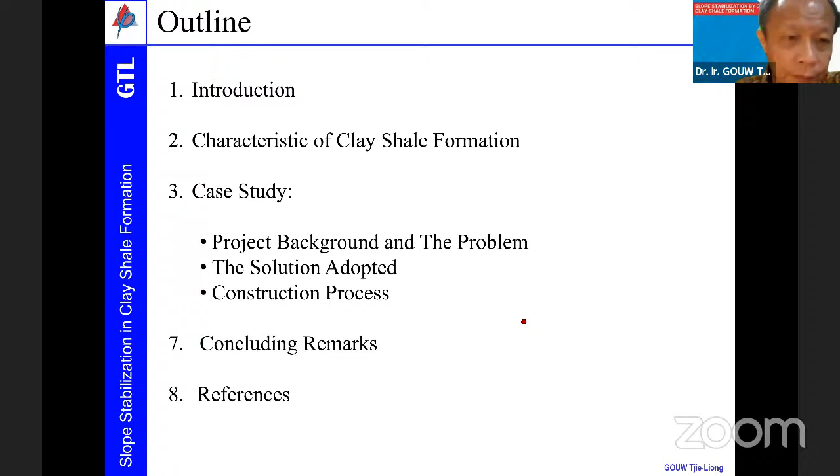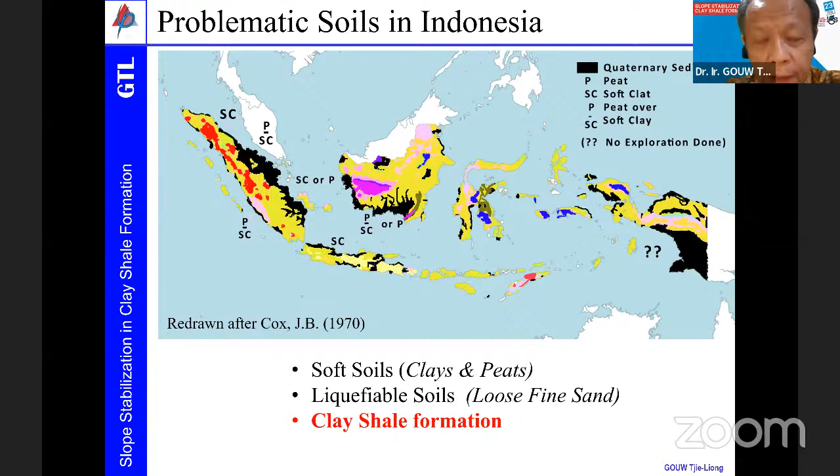This is the map from Cox, if I'm not mistaken, which I modified a little bit by adding some features. There you see the black area is the soft clay area, the peat area, and then you have also the liquefiable soil in the sandy area. We know Indonesia has had earthquakes with a lot of liquefaction occurring, including the flow liquefaction in Palu during 2018. This project is located not very far from that area, as we shall see later.

Now let us see the characteristics of the clay shale formation. Basically it is a fine-grained sedimentary rock formation, geologically formed by layered clay sedimented over thousands of years, then hardened due to long-term pressure, maybe millions of years, deep in the ground. Geological events like earthquakes have brought the clay shale formation to near the surface. In an unweathered condition, it can have an SPT value as high as 60 blows per foot, as we can see here.

Let me bring my pen. Okay, this is an unweathered clay shale formation. It is pretty good, looks quite firm, quite hard. It's a very good appearance.

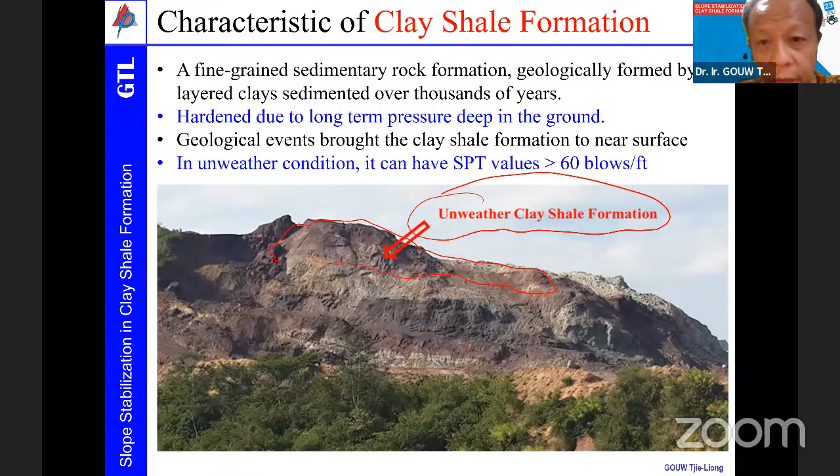Then once exposed to outside weather, this clay shale, if we expose it to the outside weather after we excavate - this is the excavation - we see that not long after, just a few days or few weeks later, it will degrade. It will just degrade and crumble. You see over here, this is from the same area, we took the picture, and it's substantially losing its shear strength. Even if they still look like rock, it easily falls off and disintegrates by just applying a small force onto it. It can be peeled off layer by layer easily.

I have some video to show later how easily we can peel off this material that looks like rock, but is easily peeled off. That's a weathered clay shale formation.

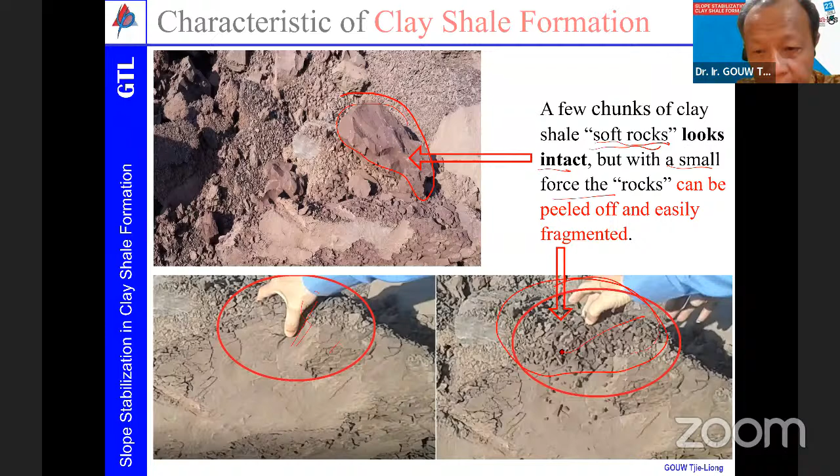This is a few chunks of clay soft rock that appear intact, look intact, but with just a small force the rock can be peeled off. This is my hand, I can peel it off. You can see over here, it's crumbled, crumbled layer by layer. It can be crumbled.

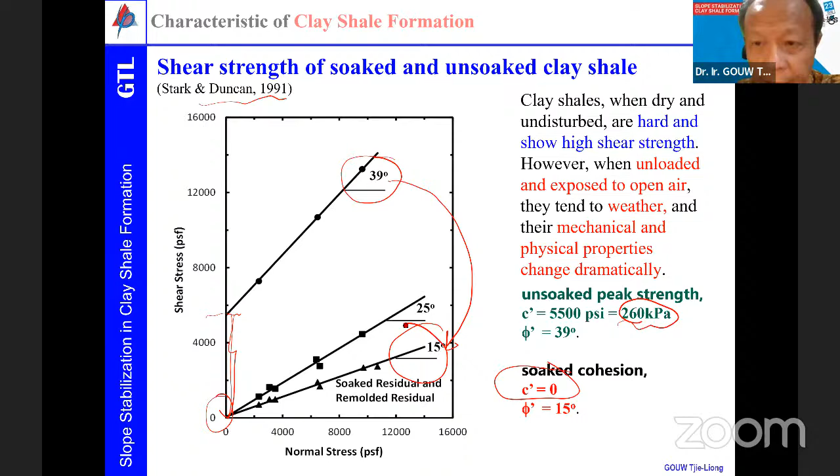Now, if we see some research carried out by Stark and Duncan in 1991 about the soaked and unsoaked shear strength property, we can see that this clay shale formation can have as high as 39 degrees angle of internal friction, and as high as 5,500 psi cohesion value, equivalent to about 260 kPa. But under the soaked condition, after soaking it for a while, the cohesion can practically drop to zero, nothing left, and the phi value can become as low as 15 degrees, from 39 to just 15 degrees. So the physical property changed dramatically - the shear strength changed dramatically upon exposure to outside weather.

This clay shale formation in Indonesia is quite problematic. In some areas, a lot of area actually has this kind of clay shale formation, therefore slope failure takes place quite often, and slope movement also.

So now we go into the project case study. This project, which I choose to present on this occasion, is located in Tana Toraja. Tanah Toraja is located on Sulawesi Island, formerly, or to many overseas people, known as Celebes Island. This Tanah Toraja area is a very special tourist attraction area where you can see dead bodies - they just put them in holes in the cliff area like this.

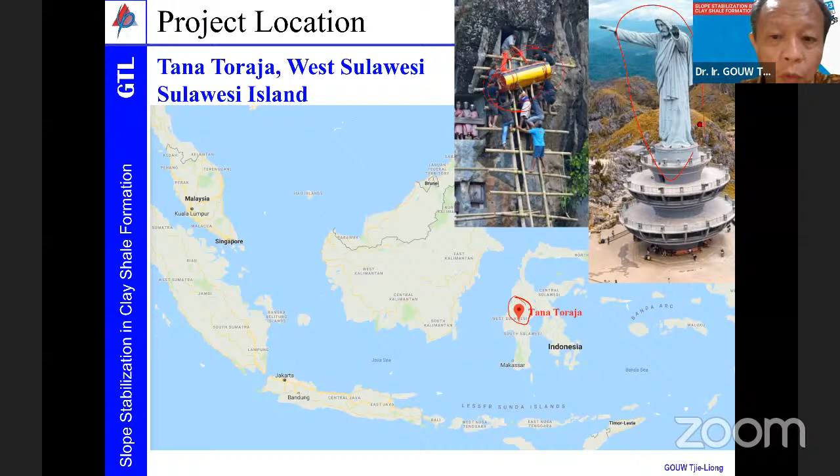And then we also have this Jesus statue, very high over there - a lot of culture can be seen there. Very special place, this is Tanah Toraja, where the project is located. And if you have heard about the Palu earthquake, Palu is located somewhere there to the north, around there.

Tanah Toraja is this area. This is the picture I took when I went over there.

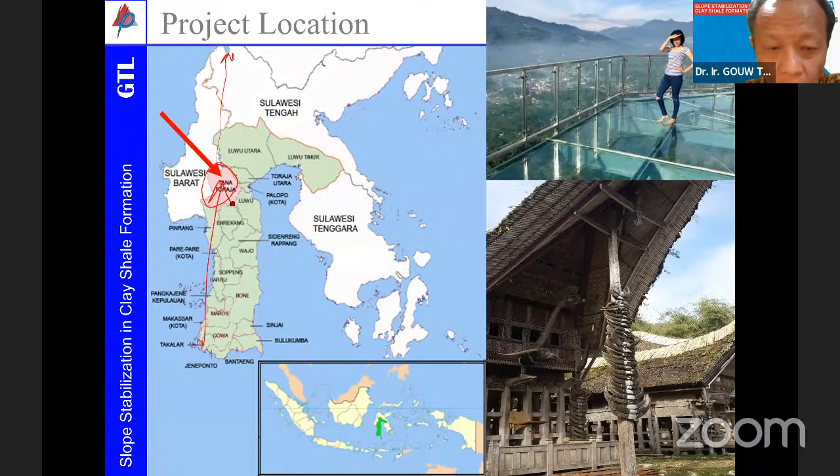So what is the project? The project is basically a runway, an airport project, to be built over hilly terrain because there is a lot of mountainous region. This airport is meant for better transportation to Tanah Toraja area, because if you go from Makassar, from here to there, it will take about 7 to 9 hours depending on traffic conditions. So the government planned to build this one, and it is already under operation, already successfully built. We shall see later in the end of the presentation.

You see here, this is the coffin, and this is where they put the corpse, like that over there. This is one of the coffins as well.

Quite an interesting area. So the new airport runway is about 2 kilometers long, from one end to the other, and approximately 210 meters wide. Located in hilly terrain, massive cut and fill have to be undertaken to get the required level of the runway. Suitable retaining structures have to be designed and built to support the high slopes that run along the runway.

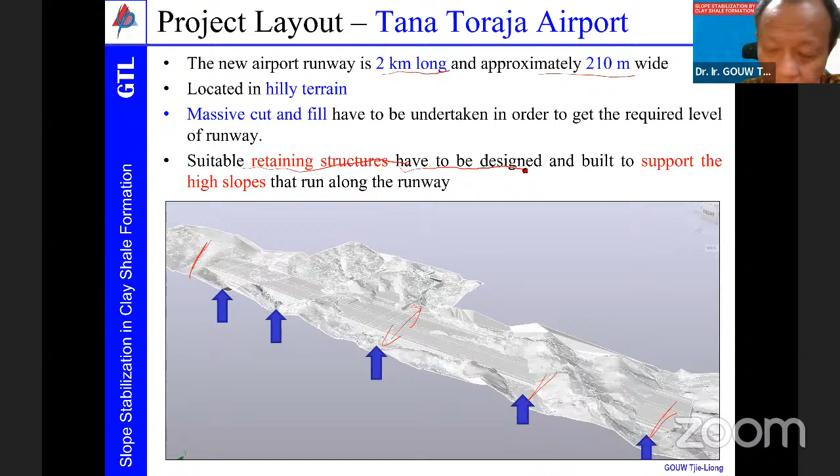Formerly, the consultant and the project had been going on before I was involved. A lot of slope failure had taken place because they didn't know about the property of the clay shale material. The previous soil investigation showed that the SPT value is quite high, but upon excavation and exposure, this is the former excavation, and it's just collapsing.

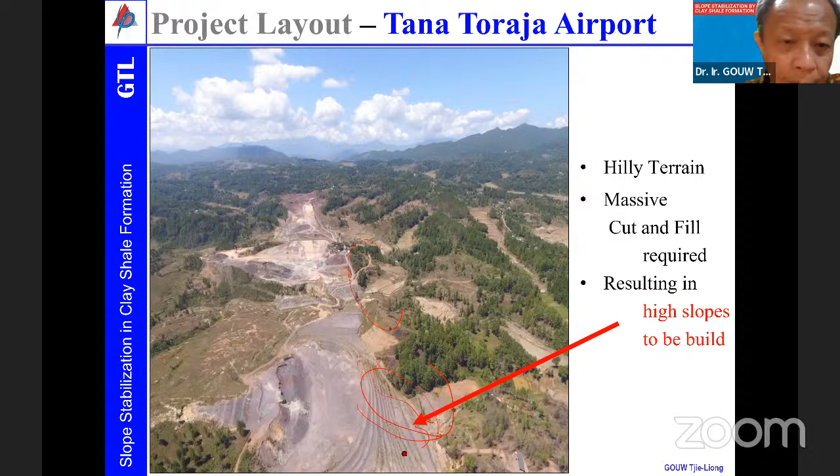So high slopes have to be built, and if no measures are taken to stabilize the slope, a lot of failure can happen, and it happened. The maximum embankment height to be built along the runway reaches 37-meter high slopes. After it was built, we can see the picture later on. The highest is 37 meters, running from around 15 meters to about 37. These are the two sections that are highest, one is 30 meters, the other is 37 meters.

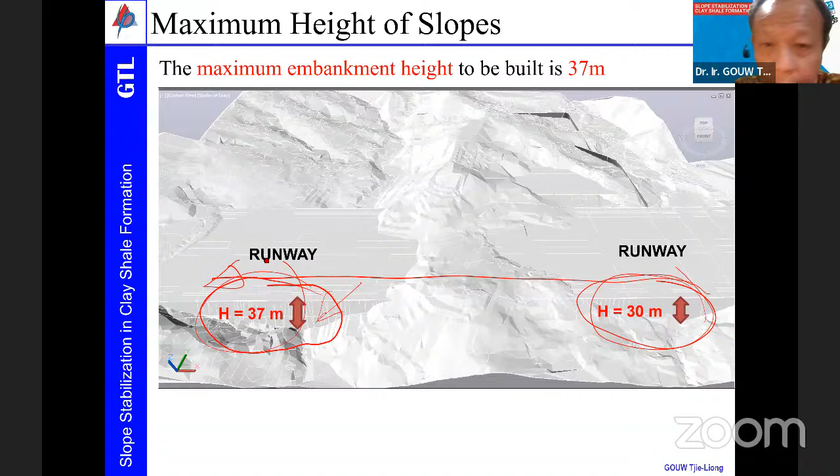So it was indicated as soft rock, with CPT cone resistance greater than 15 MPa and SPT blow count as high as 60, over 60 blows per foot.

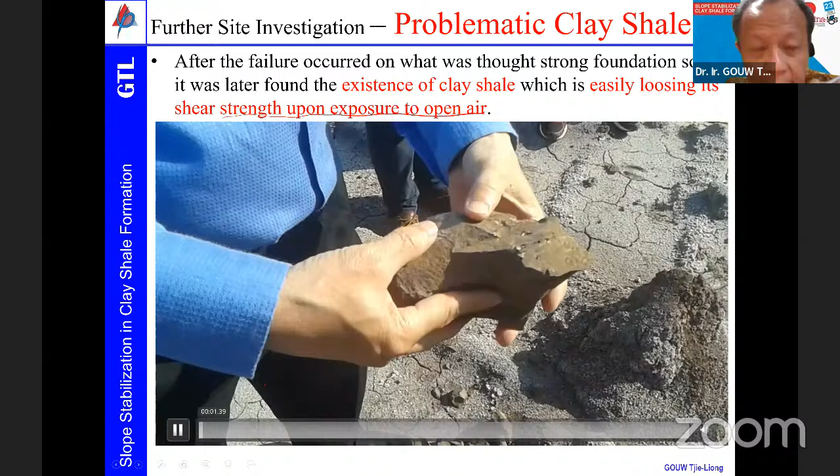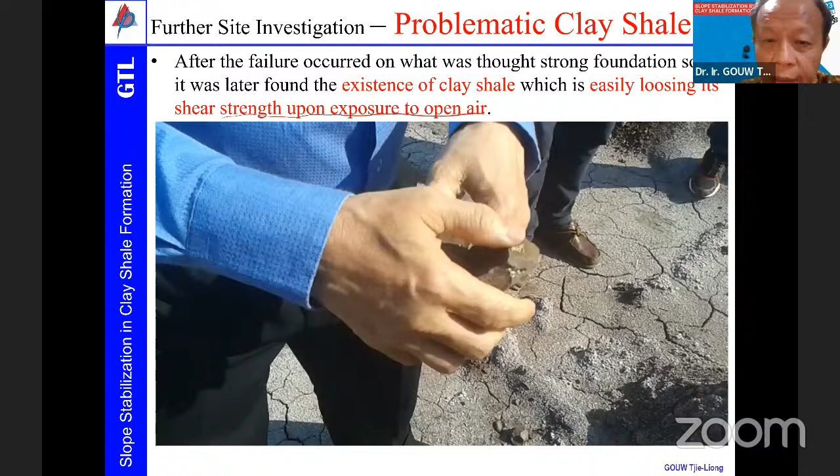You can see this is my hand when I went there. Yeah, this looks like rock. You see, I can just easily peel it off. Not a problem, not very strong actually. Looks like very strong, but not very difficult to break it off.

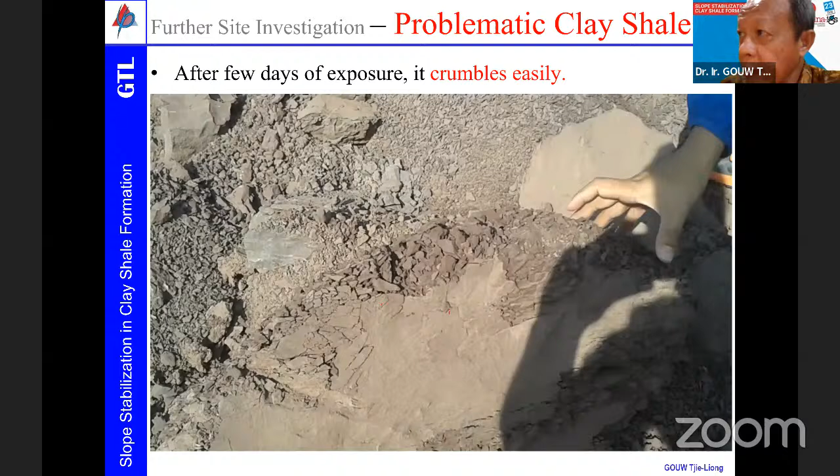That is one of the characteristics of this clay shale formation. We can see over here another one, right? It was reported a few days after it was exposed to outside weather, approximately about 7 to 10 days. When I kick it off, it just comes like that, right? That chunk is the one I picked off, and then I try to break it with my hand just now. You see, it's very easy to break it off, right?

We have many bad experiences on construction built over clay shales. Many construction difficulties and failures have been found. This is one of the pictures from a problematic highway construction over clay shales at Cipularang, West Java, Indonesia.

Construction over clay shales requires noteworthy care and adequate planning in order to minimize exposure to weathering agents, so as not to compromise structural stability. That means we have to construct it very carefully and as fast as possible.

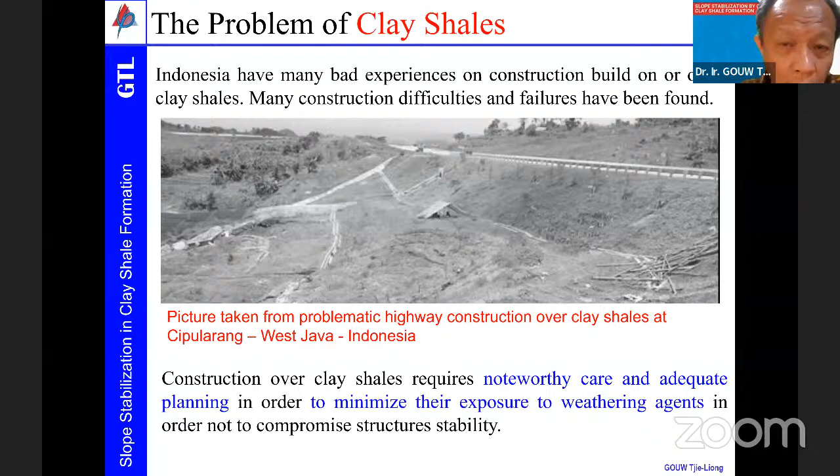Another issue: we only have cohesive backfill material. We don't have granular material over there. It's very difficult.

So what are the adopted solutions? We considered different alternative solutions as required by the Ministry Technical Committee of this airport.

One option was whether we could do it with a natural slope, an open cut and backfill without any strengthening or reinforcement. Second, we considered whether we could use a concrete wall and bore pile as a continuous bore pile retaining wall, or a hybrid reinforced soil slope.

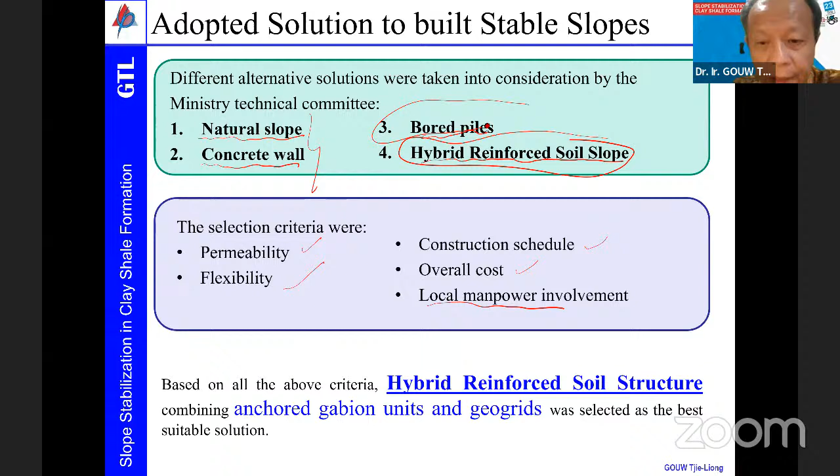Based on all the above criteria, I won't discuss all the selection options, but the hybrid reinforced soil structure, or geosynthetic reinforced soil structure combined with anchor gabion units and geogrid, was selected as the best suitable solution for this project.

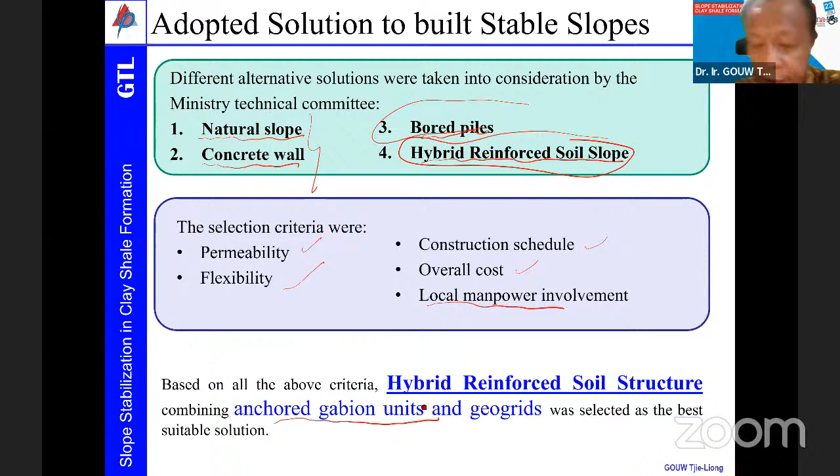So basically, this geosynthetic reinforced soil structure consists of anchor gabion - this is the gabion, with this anchor here about 3 meters in length. Underneath and behind, we put a high strength geogrid. This is the geogrid, and the gabion unit is in front.

And on top, we put a green facing unit composed of steel reinforcement, which they call the TerraMesh system.

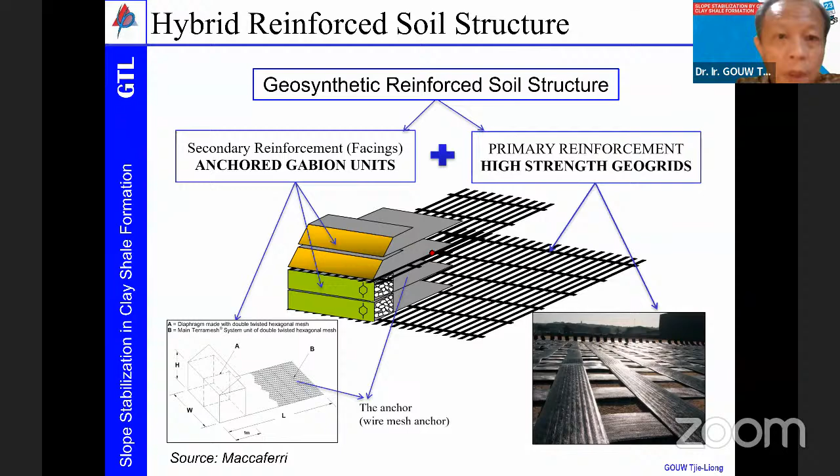Why was it chosen? Because it is much more flexible compared to a rigid concrete structure. Based on experience in Japan and also Taiwan, this type of geosynthetic reinforced structure performs well under earthquake conditions.

Remember that this area is also subject to high potential earthquakes. And it is easy to construct - local workers can be easily trained to install the geosynthetic and reinforcement, so we can employ local workers over there. Price-wise, it is cheaper than a conventional retaining wall.

Experience shows it can be applied for high slopes. In China, they built it. What I learned at one conference in India was that it was constructed up to 70 meters high, and in Sikkim, India, up to 100-meter high slopes.

But when I looked into the literature reported on the internet, you can see that in China it was only reported as up to 50 meters high. So I don't know which one is correct - 50 to 70 meters is the information that I got.

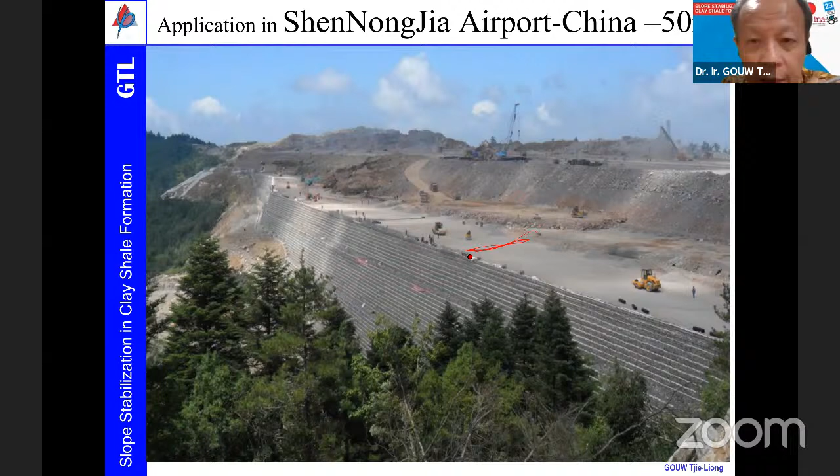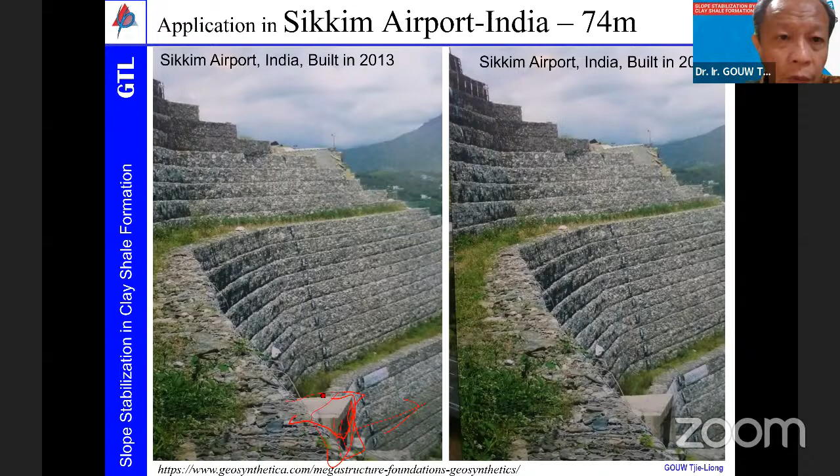So when we try to build this, of course first we have to do a proper design calculation, which will be explained later. What I suggest is that first we manage the water properly by the dewatering system, since we have water at the bottom of the slope to be built, especially in the top saturated superficial foundation portion. About the first 2 meters, in some areas, is saturated.

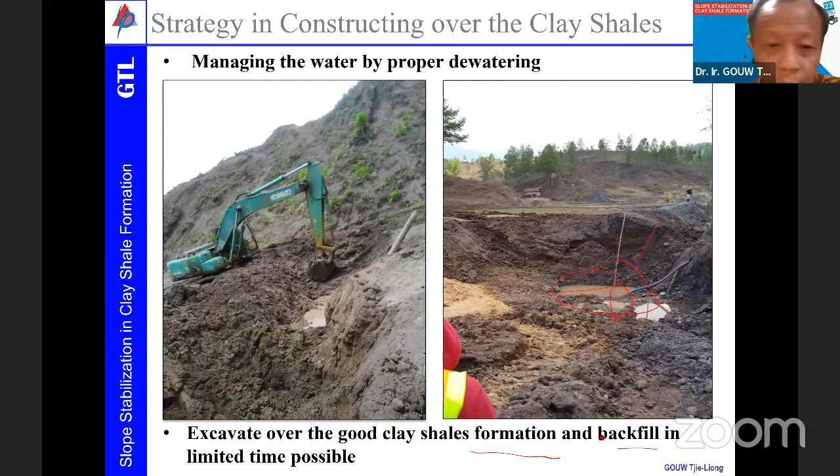So now for the design aspect. Based on the data, unfortunately we don't have time to do testing as extensive as what was done by Gartung and Stark, whose chart I showed earlier. So we do some fractional tests, but not as extensive.

Based on this chart, we can see the recommended design shear strength is 20 degrees, with a cohesion around 20 kPa. So what we adopt, based on our testing and also this chart, is C prime of 20 kPa and phi of 17 degrees for the first 3 meters of clay, even though I had cleared off the weathered part. For the first 3 meters I assume lower strength, and this is the lowest strength I took for that design, for that project.

That's based on this chart and on my judgment, in order to prevent an unwanted situation, an unwanted collapse or unwanted performance of the geosynthetic reinforced wall later on.

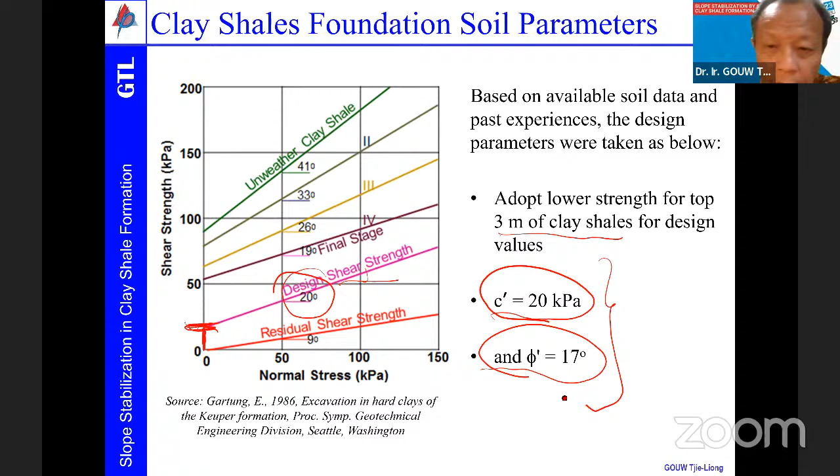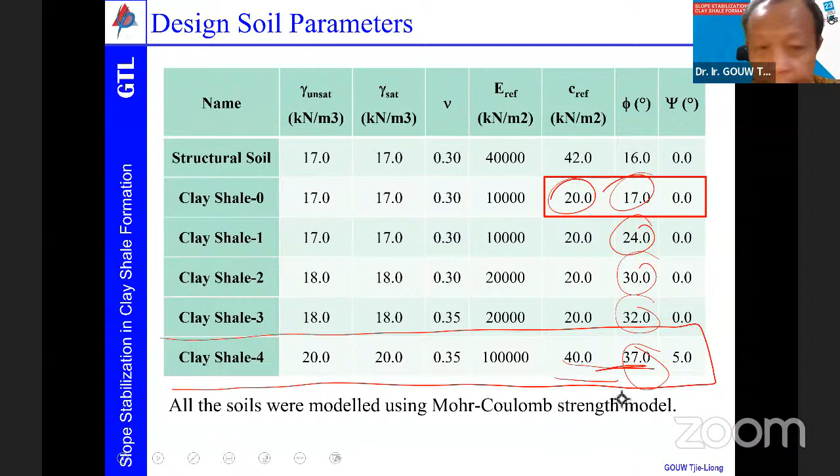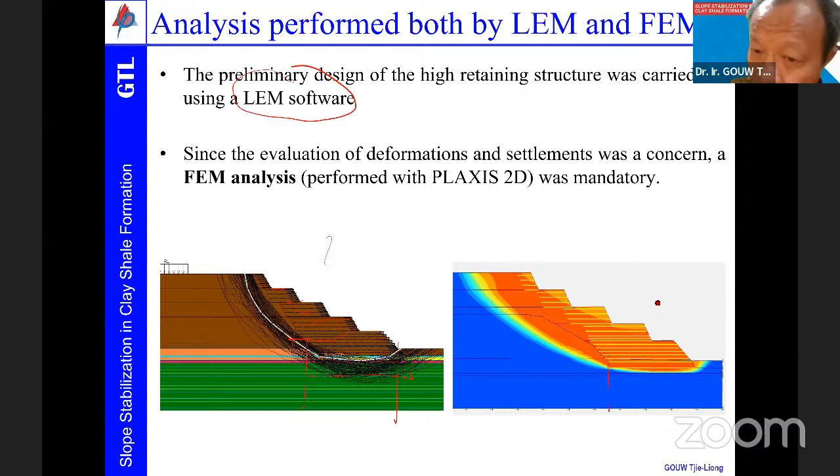These are the values that I took for the design, and the design was carried out. The analysis was carried out by limit equilibrium method and also by the finite element method. For the preliminary design, to determine the length of every layer, and the strength of every layer of the geosynthetic that we use, we used the limit equilibrium software at the first preliminary design stage. Once we got the formation from this limit equilibrium method, then we do a finite element analysis with Plaxis 2D to see how it performs. That's what we do.

For the earthquake, 500 year return period was required based on the Indonesian standard, with a PGA of 0.2 to 0.25 G. Since we do a pseudo-static analysis, we don't do dynamic analysis of the earthquake. What we took is the horizontal seismic coefficient as 50% of the PGA, based on references and some codes, and the project team finally agreed on that. That's when we assume the PGA is 0.3. Actually we don't take the full 50%. So what we took is KH equal to 0.15 for the evaluation.

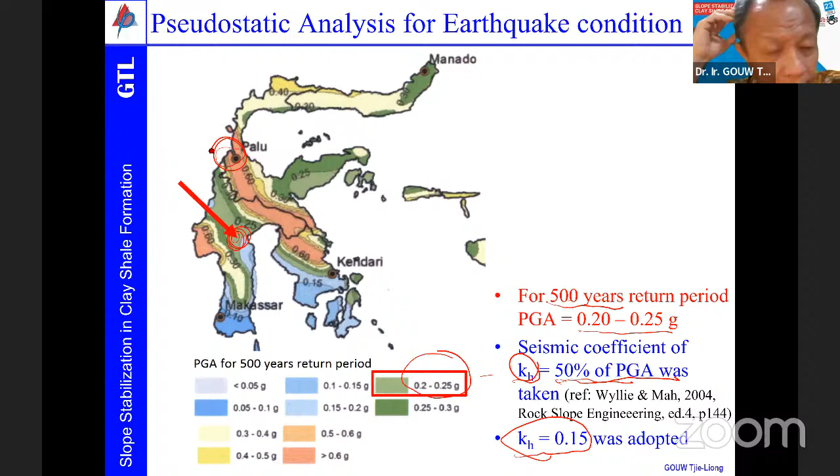The project is located here. This is Palu, where the September 2018 earthquake happened that caused a lot of flow liquefaction, and I think it was the largest liquefaction ever recorded, as far as we know.

What was achieved from the design is that the safety factor with the limit equilibrium software under static condition is 1.62, and under seismic condition is 1.1. With Plaxis software it's about 1.67, and the seismic condition was 1.12. Not very far different, a good match, relatively good match. The minimum safety factor required is around 1.5. This is what is required by the code, 1.5 and 1.1. So it gives similar safety factors and satisfies the requirement.

The limit equilibrium software, of course, cannot provide the structure deformation and settlement. This information we got from Plaxis. But as we go topping up, you know that deformation actually takes place during the construction when we build the geosynthetic reinforced earth wall. So it will be adjusted.

The shear stress developed in the soil-geogrid interface is calculated according to the Coulomb stress criterion, which means we reduce the shear stress on the soil. This is the geogrid, and the interface between the geogrid and the soil. We reduce the strength based on this formula, which is the Coulomb shear strength formula. The tangent phi is the internal angle of friction of the soil. For the interface, the internal friction angle will be reduced by R-inter, a reduction factor, multiplied by tangent phi of the soil. The cohesion C will also be reduced the same way, by the R reduction factor multiplied by the original soil cohesion.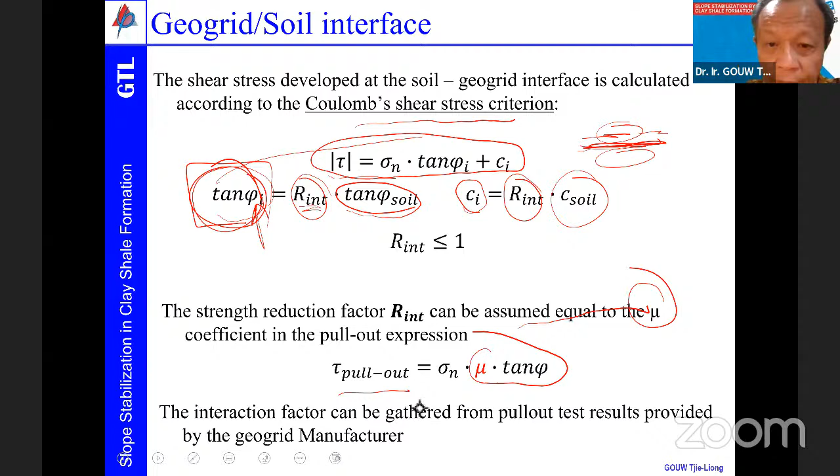R-inter is less than 1. The strength reduction factor can be assumed to be equal to mu, over here. For the pull-out resistance, the interaction factor is taken from the pull-out test results provided by the geogrid manufacturer. We got, I think, around 0.85. That's how we designed this project.

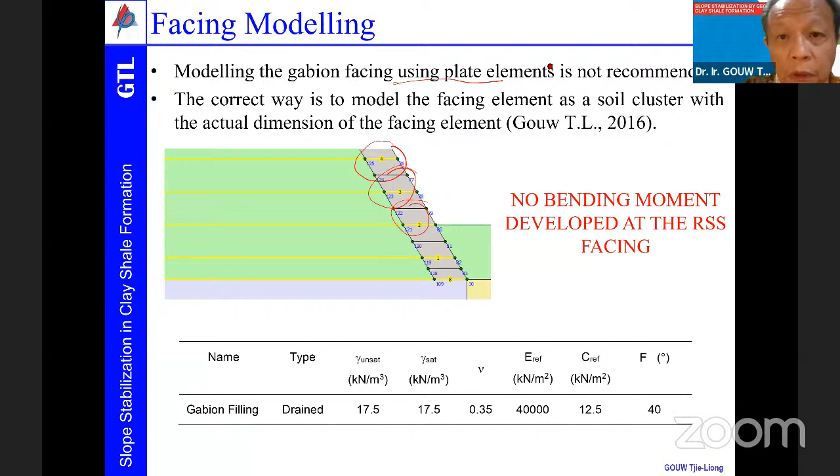Modeling the gabion facing: how do we model the gabion facing here? We model the gabion facing by using a soil cluster. We don't use a plate element, because plate elements are normally used for vertical walls. If it's a vertical wall, you can use a plate element, but on every facing thickness, every module of the facing is concrete, so you have to put a hinge so it can freely rotate.

There's also an option in Plaxis where you can set it as free. If you model it as a plate element, but this is an inclined wall. We took this at about 45 to 70 degrees maximum height. The maximum slope we designed at that time was around 60 degrees, if I'm not mistaken.

This is the geogrid, the yellow one is the geogrid, and the gray one is the gabion facing. So we model it as a soil cluster, and these are the parameters. We take it as drained because water can easily flow out through the gabion. So we took it as drained. Gamma is the unit weight of this.

Yeah, it's a bit low with the value that we took. This is the overall stiffness of the gabion we assume, and the C value is here, and this is actually the phi value, which we assume as 40 degrees. Why did we take the C value? Because it's a gabion, it's tied up and reinforced with wire, so we assume there is a C value there.

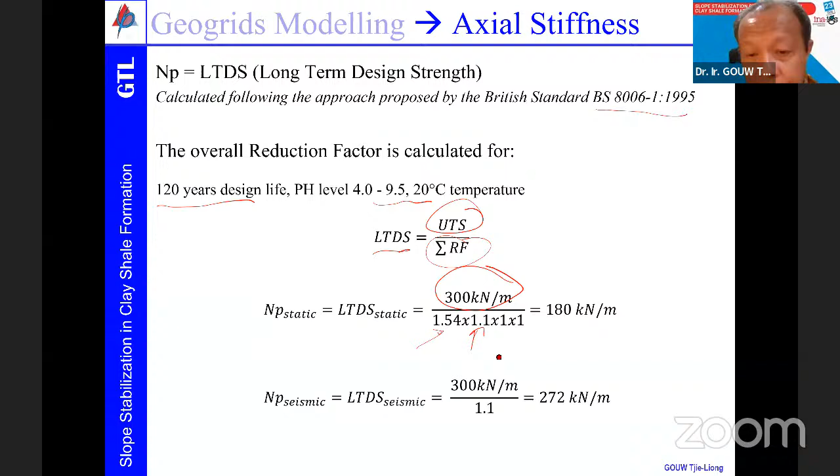So the long-term design strength is calculated based on the British standard, with the overall reduction factor for a 120-year life, at pH level. It's the ultimate tensile strength divided by the sum, the multiplication, of all these reduction factors: the creep factor, the damage factor of 1.1, installation damage, and another factor which we just took as 1.

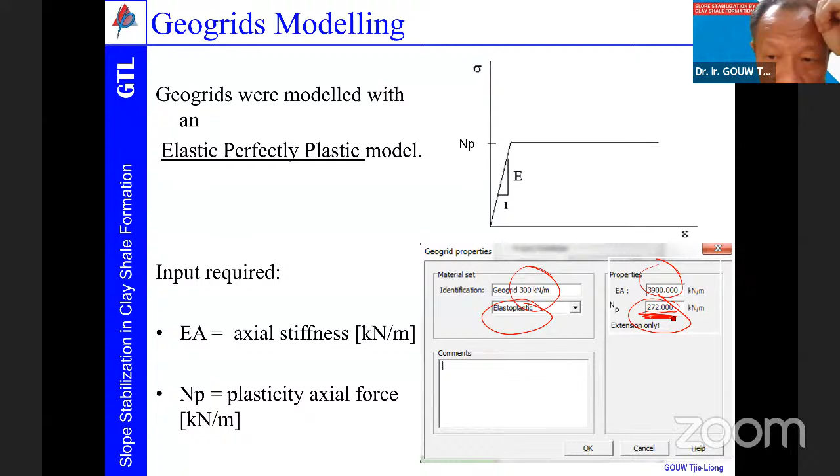So under static condition we take 180, and under seismic condition we took 272. If we go back here, this is the analysis for the earthquake — we increase this NP value, the maximum value during the earthquake. We take this higher value, but for static condition we took 180.

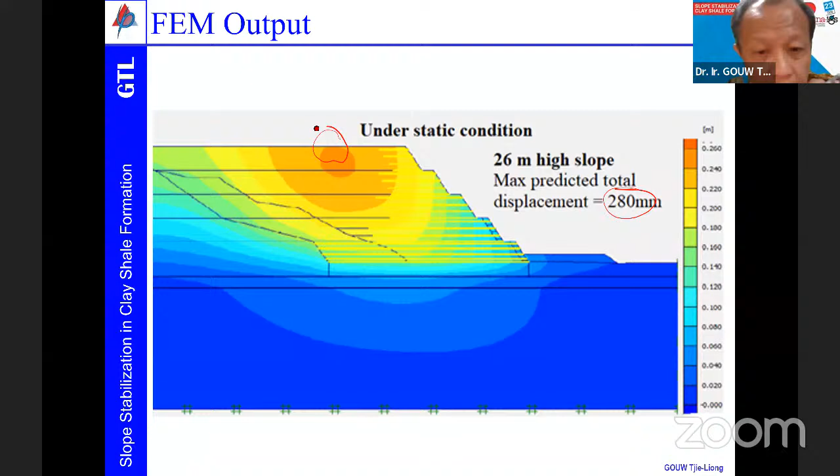So this is one example of the output under static condition, for the 26-meter height slope. The predicted displacement will occur somewhere around here, about 280 millimeters. This is based on an analysis as if we are topping up everything without any leveling up, so in reality it should be lower than this.

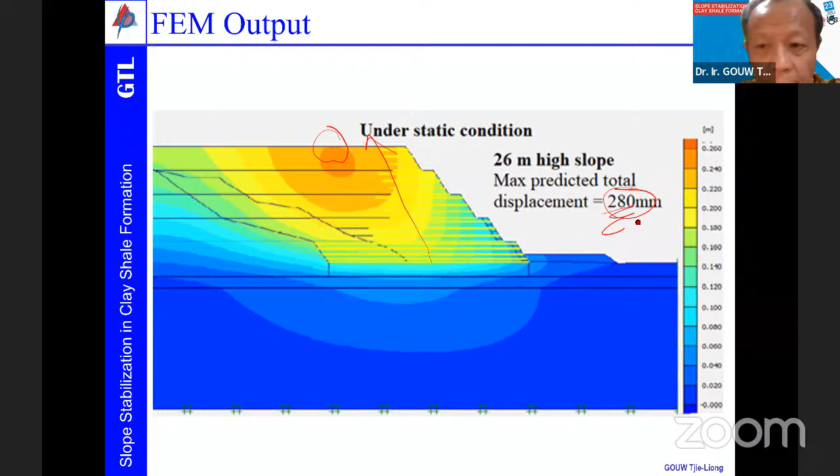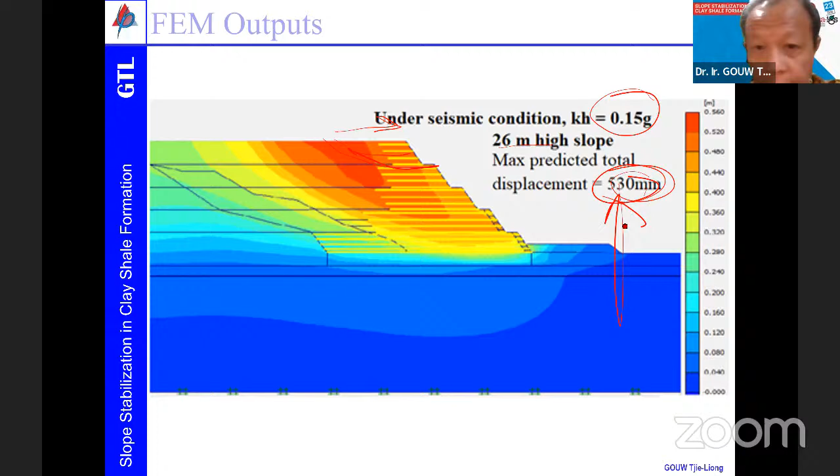Under earthquake condition, with 0.15 gravitational acceleration, for this 26-meter high slope, the predicted maximum outward movement will be about 53 centimeters. But no one knows whether this will actually take place under a seismic condition.

Remember that we can only use the clay material, cohesive material, to compact. We don't have the granular material.

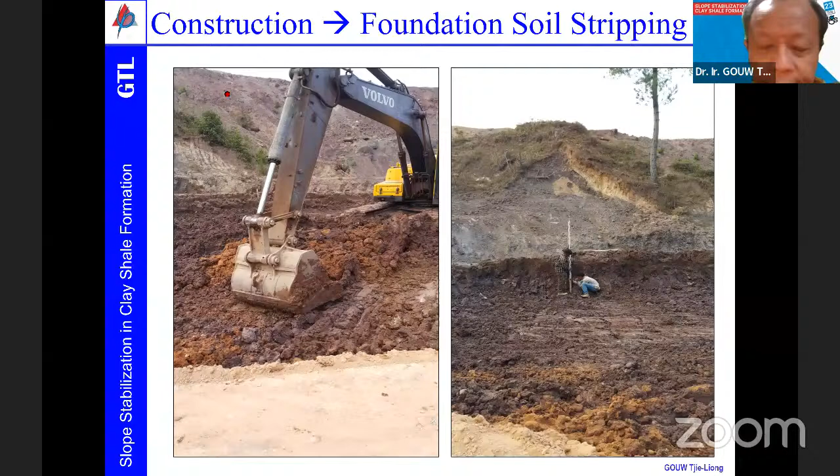So these are the construction. We excavate. We took out the soft soil, the weathered clay shale, up to the firm one. After we got the fresh, more or less fresh clay shale, we stop. Every excavation is not very wide - you see over there, we stop there. Over here, we excavate, then we start building up first, covering the first 1 meter at least.

So we lay the geogrid, lay the geotextile in front over here to cover it, to prevent intrusion. This acts as a separator, and later on we put fine grain over here and compact it, to prevent intrusion to the gabion system causing loss of particle. Of course we have to put this geotextile, non-woven geotextile. So these are the process of the working.

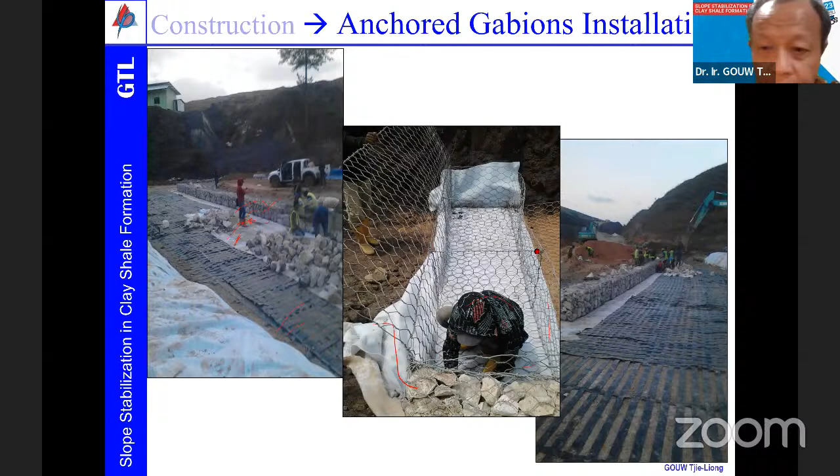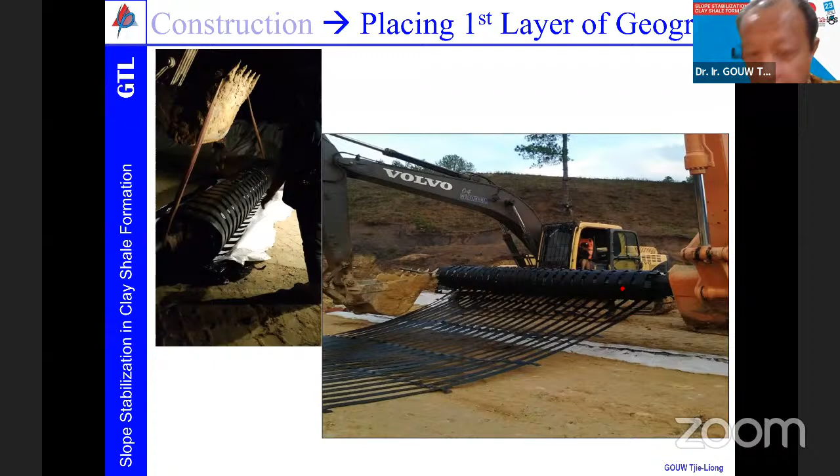This man is laying the stone inside the gabion. So this is where we show how to lay the geogrid, the high strength geogrid. Even at nighttime, they still do the work, because as I said, to minimize the exposure of the very bottom layer, we do it 24 hours a day at that time.

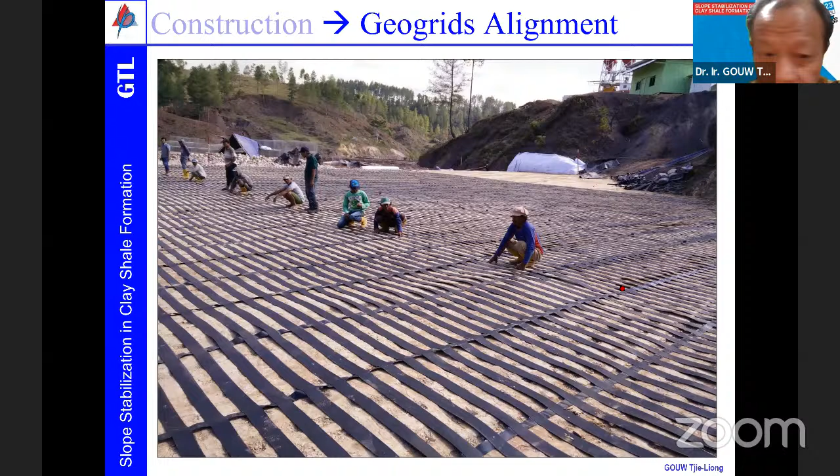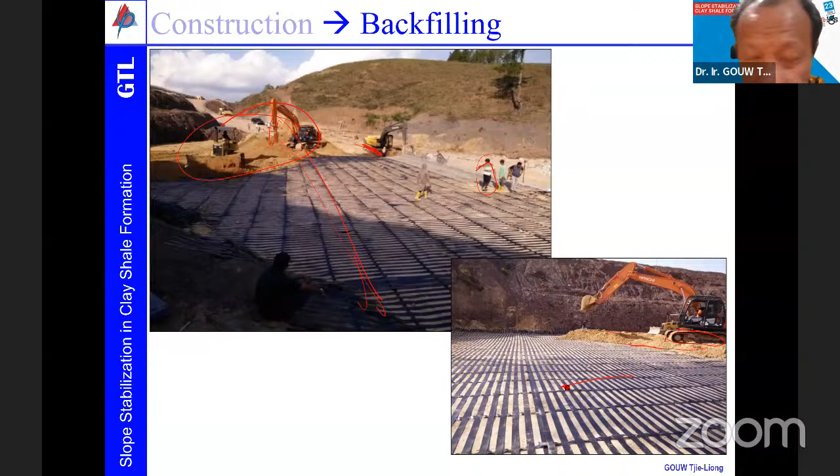So these are the overview of the laying off of the geogrid. Start to the backfilling, not a very wide area. If you compare, this is the size of the excavator, not very wide, from here to here, so that to guarantee exposure as short as possible. So this is one of the important things - when we lay this, the track of the equipment has to walk on the soil, not directly on the geogrid. If directly on the geogrid, it will just damage the geogrid.

So these are the compaction events. Compaction was done layer by layer, every 40 centimeters roughly, compact it, and then we test it like this. This is the process - cover the first layer, this is all completely done, then before moving to the next section, this is what we do, again to prevent the weathering of the base of the clay shale.

This is the drainage system. Once we go out from the ground level, we start installing this drainage system behind with a geotextile, to prevent intrusion to the drainage system. All this stone block will be placed, and then layer by layer, try as much as possible to compact it, in order not to create a weak layer behind, to drain out some water that could seep from the hill behind.

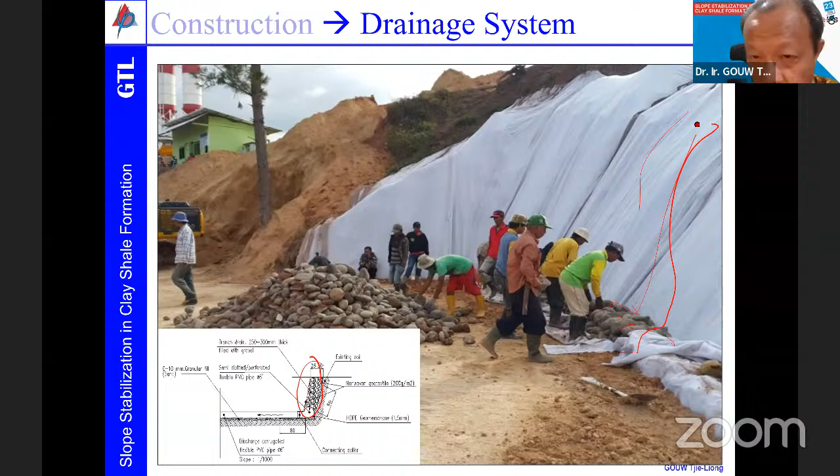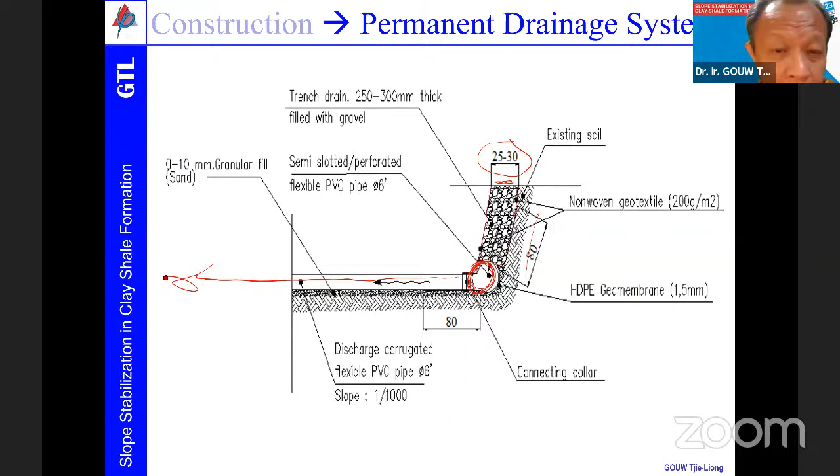So these are the details of the drainage system. It's about 25 to 30 centimeters width, and then about 80 centimeters. Then we have this pipe, and we channel it out through the outside of the retaining wall, retaining system. What I worry is that if the pipe is leaked or broken, it will just seep into the ground and then goes into the clay shale below.

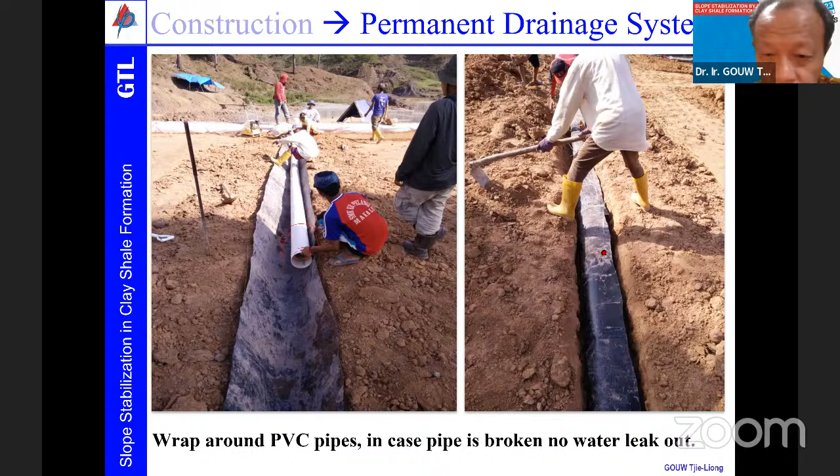Therefore, I require the project to wrap it around also with the geomembrane. The pipe we wrap around with geomembrane like this, then bring it out. Eventually it will be like this - this is after we stage it up. Every stage is about 1 meter, from the bottom 1, 2, 3, 4, 5 - this is already about 5 or 6 meters high, something like that. This is the drainage pipe, the detail coming out from the gabion.

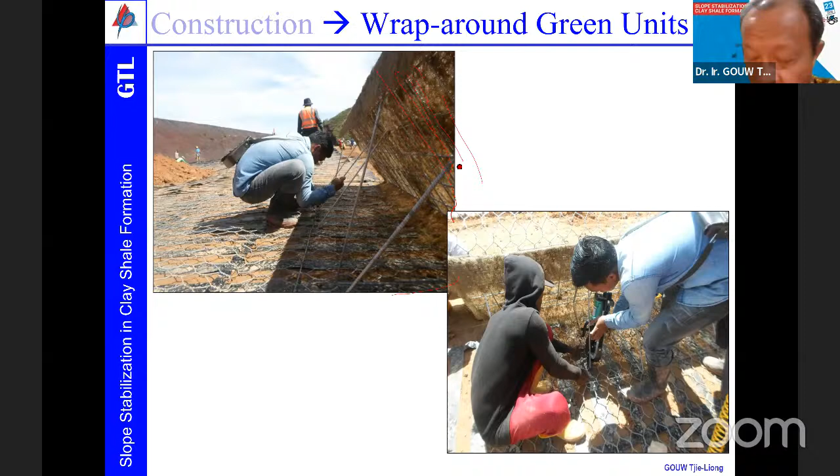After a certain level, not the whole thing is under gabion. Some of it, after about 60% of the height, we put the so-called green terra mesh, just with reinforcement by the wire mesh, so that grass can easily grow over here as the facing, because the stress on the top one-third is not very high already.

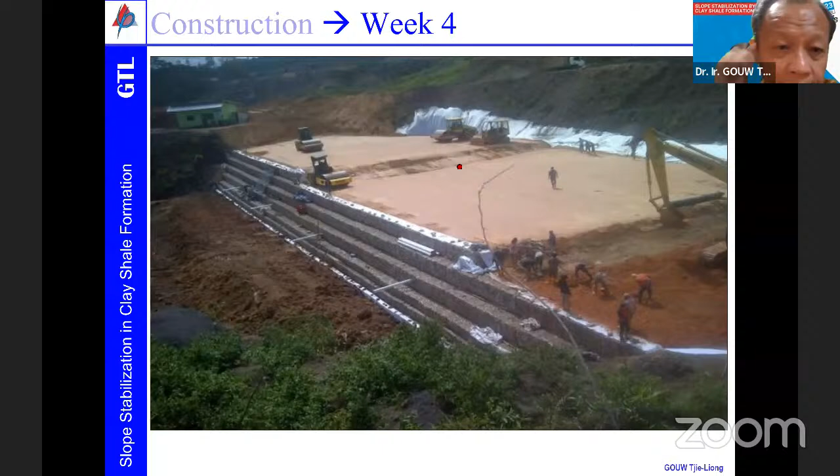So we put it like this while we construct, and this is the construction process when we're building up. You can see here is about 8 to 10 meters high already from the very bottom.

This is the compaction process. You see, this is higher and then lower. This is the lower one.

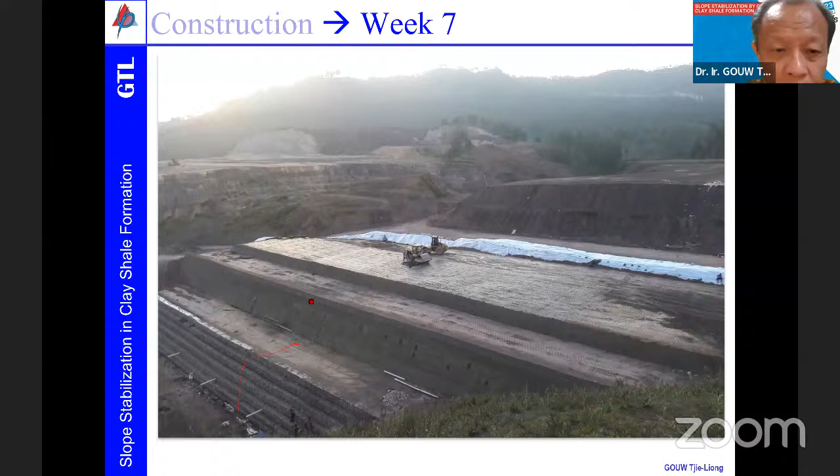It's just compaction like that. Installation is going up step by step. So for the very high slope, we have the berm like that, sloping up, and then it's moving like that. Then we go up, up to the highest one which is 37 meters high.

So these are the base anchor gabion units, and then we have this green terra mesh. This is wrap-around, 50% of it. We start installing the gabion, the green terra mesh, not by gabion anymore, only on the bottom part with the gabion.

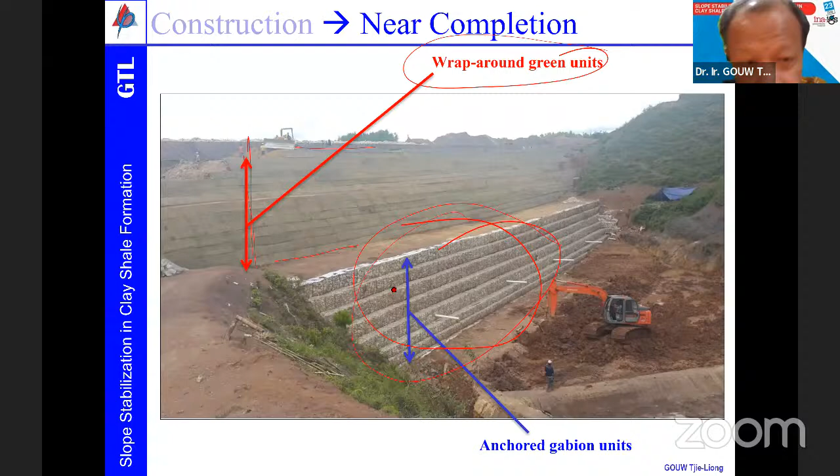This is the overview of the whole project. You can see this is still under construction behind the rig. So it's not only over here, we also install the drainage over there.

And this is the mulching for the vegetation, for the green terra mesh. Just now we showed that, then we start putting some mulching for the vegetation to grow the grass over there.

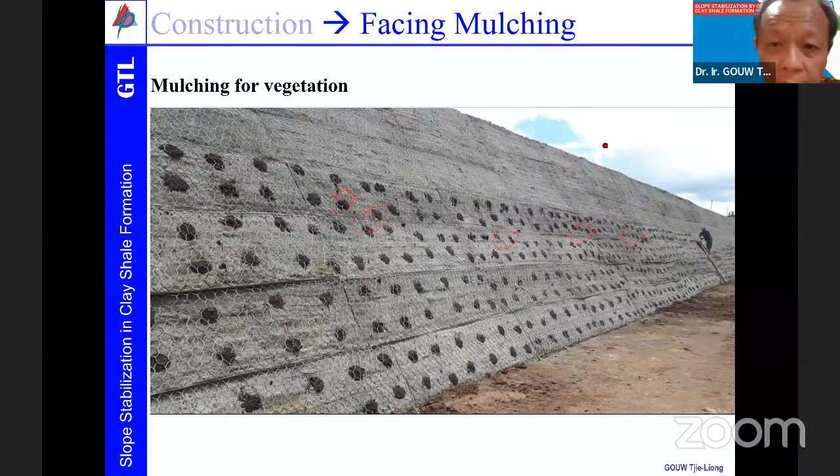This is the grass started to grow. You can see it started to grow in about probably three weeks time, and then the vegetation is growing. You can see over here is already quite a lot.

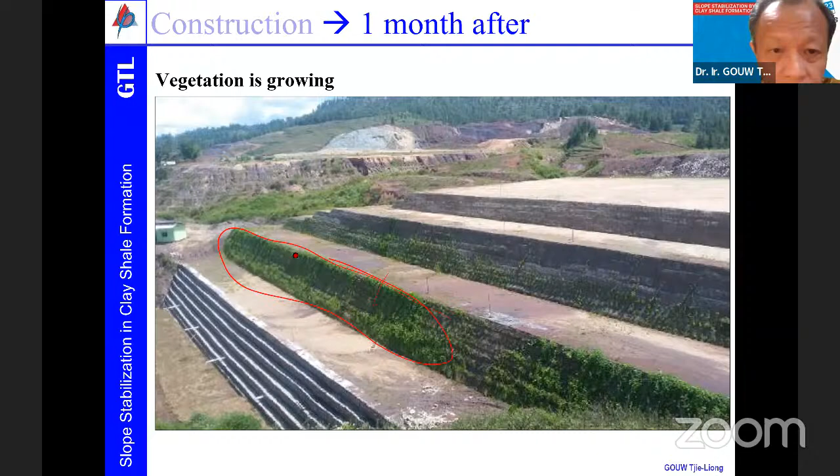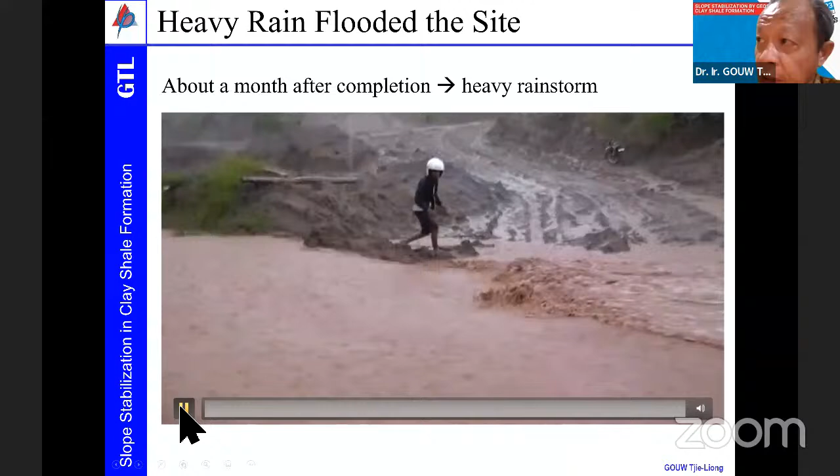Let me show the video over here. There's the flooding, it's just like a river. Unfortunately, the contractor hadn't had enough time to build the proper drainage behind. So this was also an unexpected event, the flash flood coming in, very severe rain.

The water is flowing through. Actually, some of it is flowing through the wall that we had built. This is flowing out to the channel. I'm very worried, I'm very concerned about that.

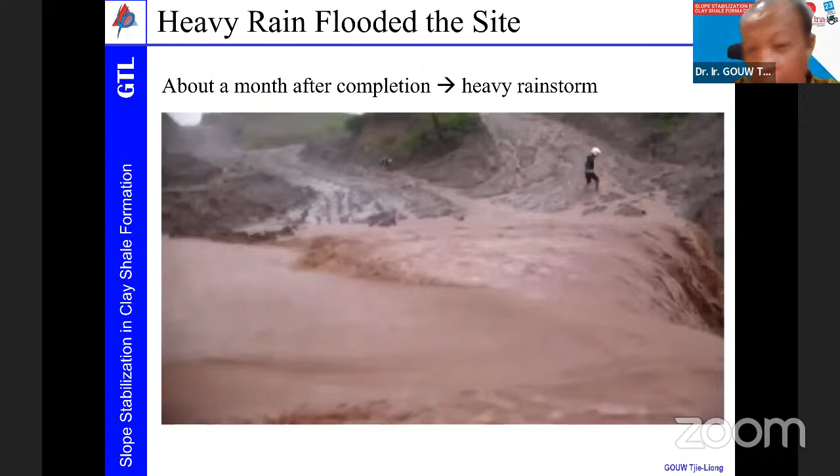This was happening, if I'm not mistaken, somewhere around July 2016, or something like that. It's happening like that, if I'm not mistaken. I'm worried, I'm very worried.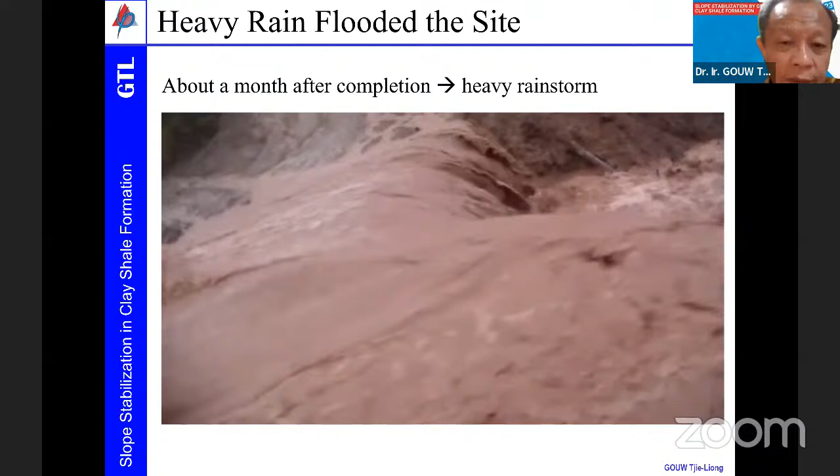But when we see this after the flash flood, it's just washing out the green grass that had just grown. Before that, the grass had actually been growing quite a lot over this area, and it's washed out, causing some damage, but not like this one.

You see some spoiling of the soil, but it's not very severe damage. It's a result of good compaction, I think, I believe, because the contractor did the job very seriously, and they did the testing and compaction in a very good manner.

So the project could go on. Then we did some minor repair. Then in conditions in 2018 and 2019, you can see that was happening about 2016, 2017, and then over here 2018, this is already reaching the highest level over there.

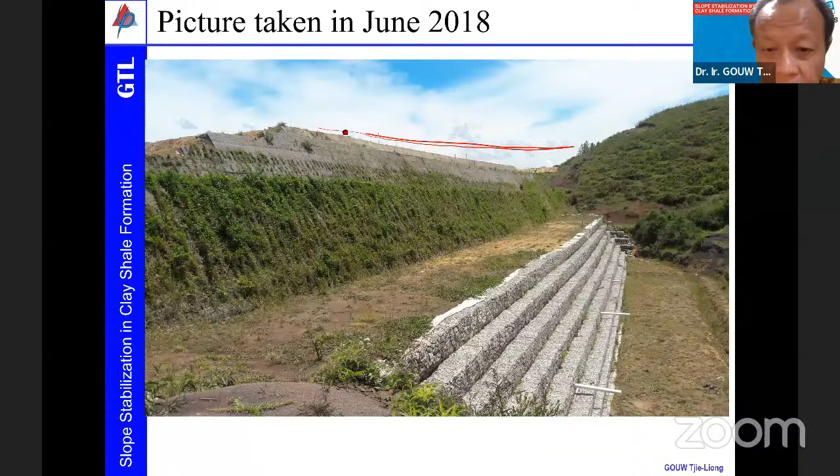Then this one, another one, some of the grass already growing. Over here the same, it's quite thick already. The grass is already very thick.

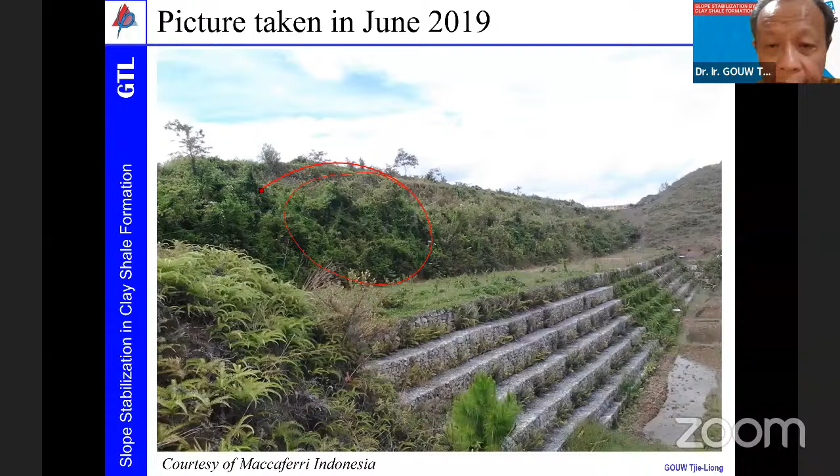See it once again. See.

Now it is already under full operation, but unfortunately I didn't get the newest photo. I wanted to know how this appearance is already.

So that is what I have for this presentation.

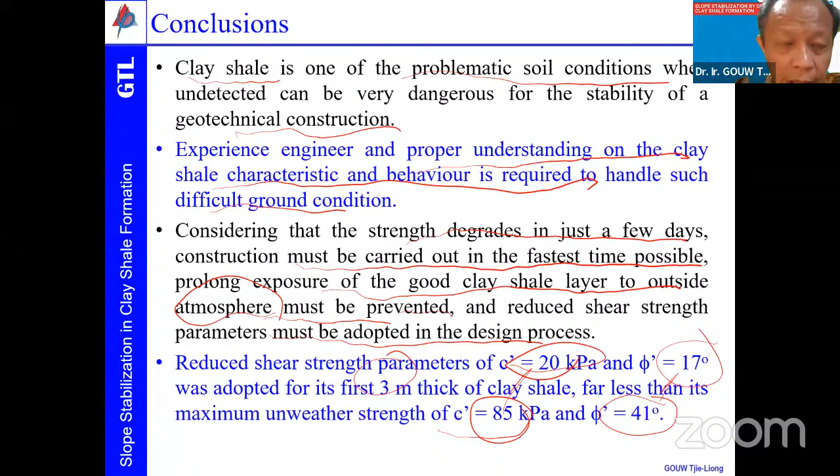This is what we did on that project. The reinforced soil slopes, as long as properly designed and carefully executed, can be built on the clay shale using cohesive material as backfill material.

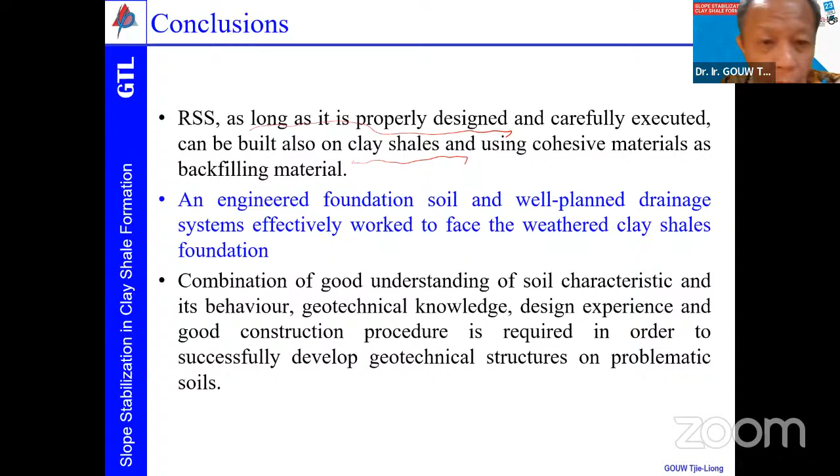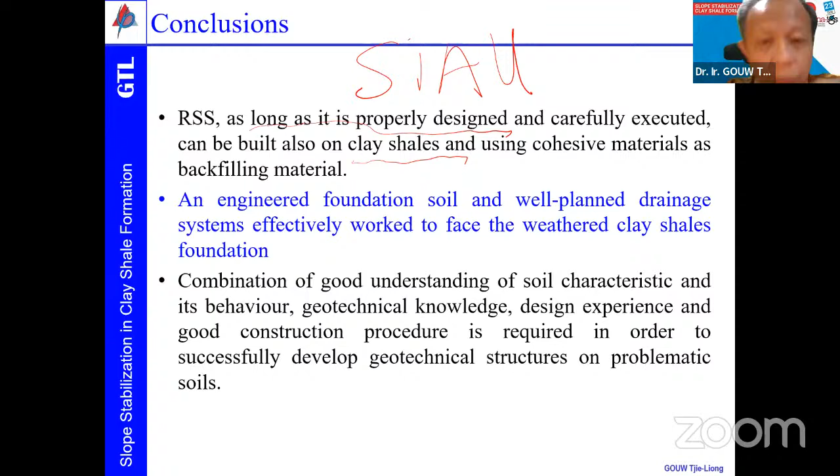By the way, I have done a similar design on North Sulawesi, on Siau Island, one of the islands near the Philippines, also for an airport, where a similar system was adopted for a 42-meter high slope. It's the highest slope I have ever designed and had built.

Of course, I was only the consultant for the 42-meter design, but part of it was under my engineering supervision, at least at the very beginning of the project.

Engineered foundation soil and a well-planned drainage system effectively work to face the weathered clay shale foundation. A combination of good understanding of the soil characteristics and behavior, geotechnical knowledge, design experience, and good construction procedure is required in order to successfully develop a geotechnical structure on problematic soils.

These are the references that I used during the design, also during the write-up of this presentation. Thank you for your kind attention.

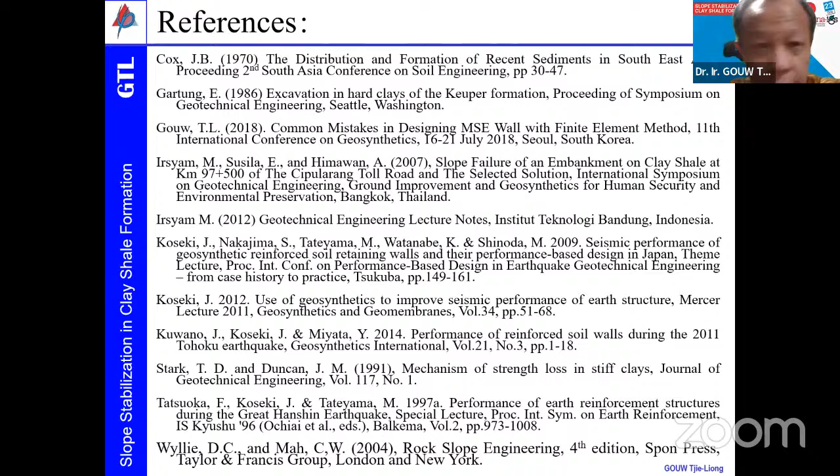All right, thank you for that presentation, very informative, very interesting. Just as you were doing your presentation, some questions have already come in. We have quite a bit here. How would you like to do this?

Okay, I saw some of the questions. Maybe I can try to answer from here. The first question is from Muhammad Jaki: how much time does clay shale need to collapse after weathering?

That one is from my experience on this project and another project. It can vary, from around 2 weeks time to about 3 months, roughly like that.

By the way, clay shale formation is also found along the Cipularang area and also in Hambalang, near Jakarta, and quite a lot actually in Java Island. What I can answer is it's around 2 weeks to about 3 months, depending also on the slope and the construction you build.

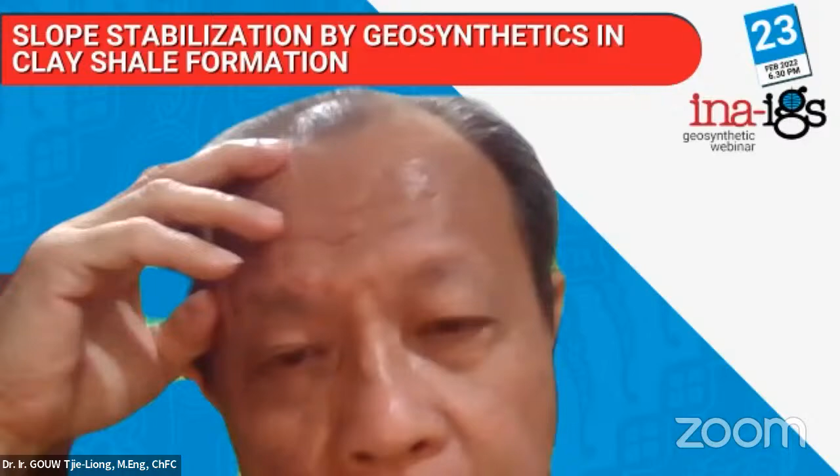What method could be applied on a cut slope that will be exposed? Of course you have to cover it as fast as possible, not expose it like the situation in Sentul. I encountered this clay shale formation back in 1993 when I was called upon at Hambalang, not the Hambalang that's very prominent, but a housing area early in 1993 that collapsed after they excavated and exposed it. They had already built housing there. About four months after they built it, the slope collapsed, because it was exposed to the outside weather. They always thought this was good, so they didn't cover it.

So the thing you have to do is cover it, probably shotcrete it, or cover it. Nowadays you have all kinds of geosynthetic materials. Maybe you can put GCL, geosynthetic clay liner, to prevent rainwater from seeping into the slopes. That can be applied.

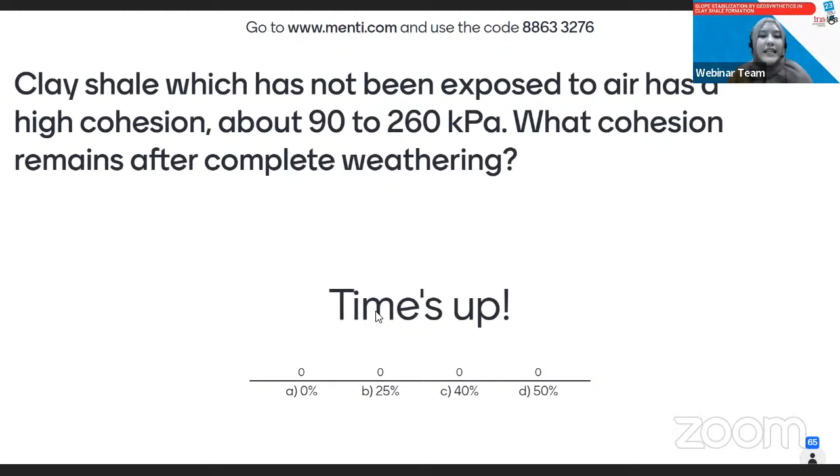Is it A, B, C, or D? You have 10 seconds left. Is it 0%, 25%, 40%, or 50%? 3, 2, 1, time's up. The correct answer for the second question is A, 0%.

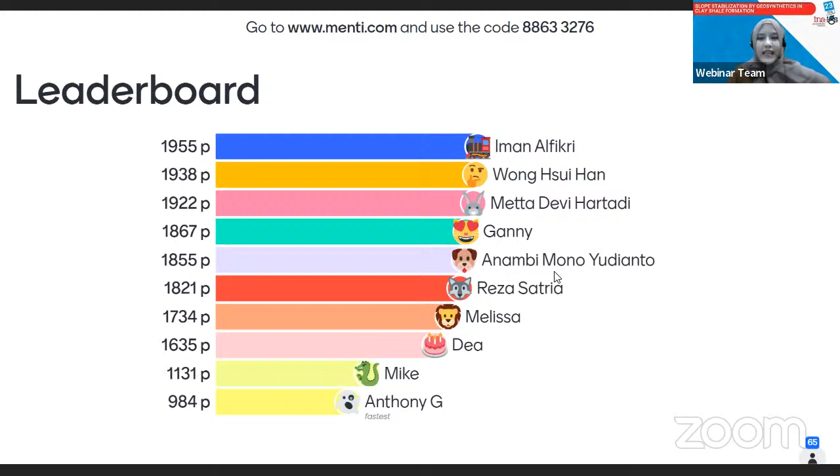Let's see for the second question, yep, the leaderboard is changing. Let's see for the last question. Who will win tonight? There will be 2 winners. Answer fast to get more points.

From these reinforced soil wall projects, which height is correct? Is it A, Tana Toraja with 37 meters, or B, Shen Nong Jia at 74 meters, or C, Sikkim at 50 meters? Which height is correct, A, B, or C?

Is it Tana Toraja with 37 meters? Is it Shen Nong Jia with 74 meters? Or is it Sikkim with 50 meters? You have 50 seconds left. This is the last question, this is going to be the decision of the night. 3, 2, 1, time's up.

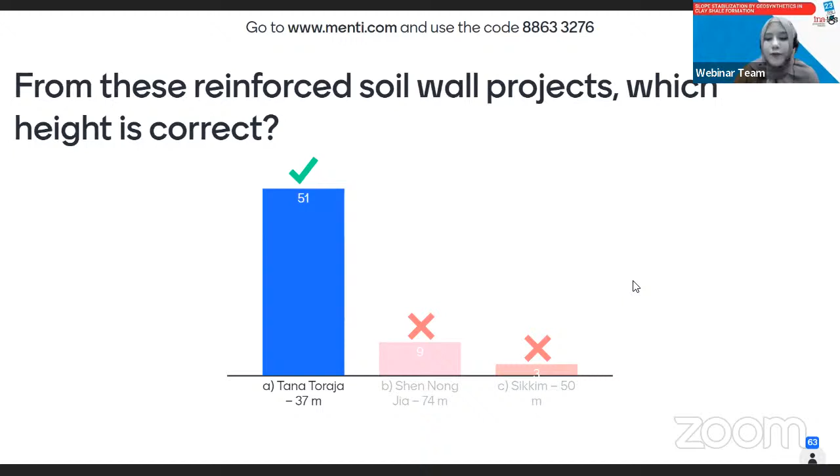The correct answer for the last question is A, Tana Toraja. There are 51 people who answered correctly. Let's see who will win tonight, there will be only 2 winners.